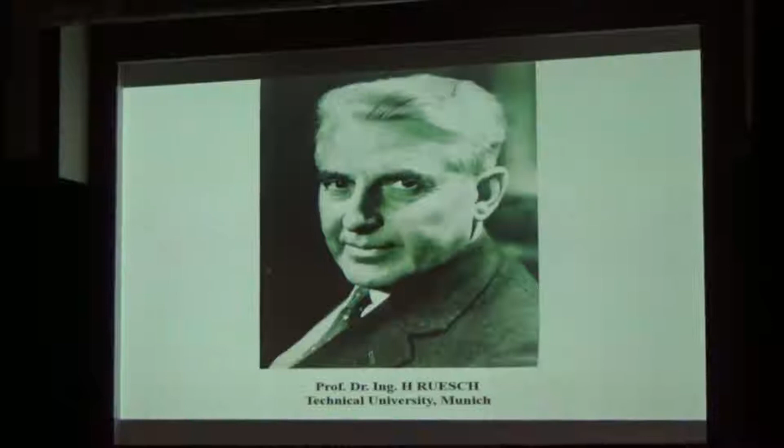I studied at IIT Kharagpur, both BTech and MTech, and my teacher of reinforced concrete structures at the BTech level was Dr. Malik. Unfortunately, he is no more, and I don't have his photo, that's why I'm not showing that. Professor Dr. Varghese, quite a number of you must be knowing him. All the people at IIT Madras know him as the first head of the Department of Civil Engineering, but I knew him much earlier. He was my teacher in MTech at IIT Kharagpur, so he was in a way a mentor for me in my initial postgraduate studies. Then the great master under whom I worked, Professor Ruesch, Professor of Concrete Structures at the Technical University, Munich, who taught all his students, including myself, the purpose and methodology for research in concrete structures.

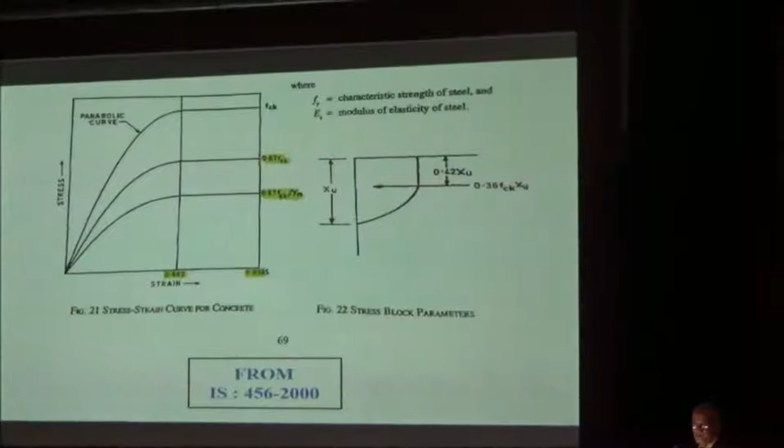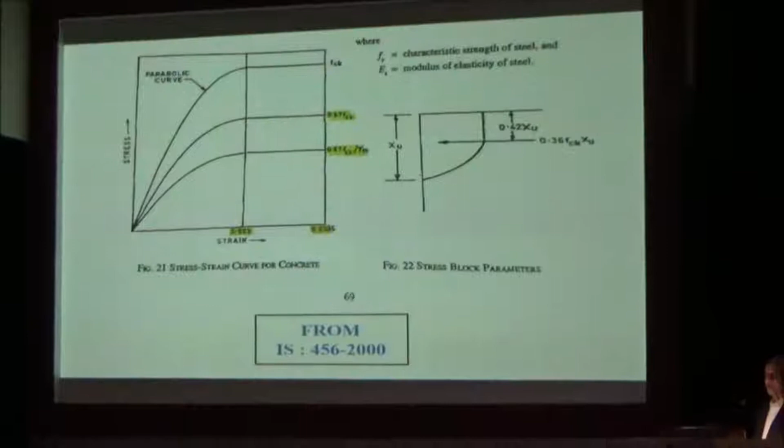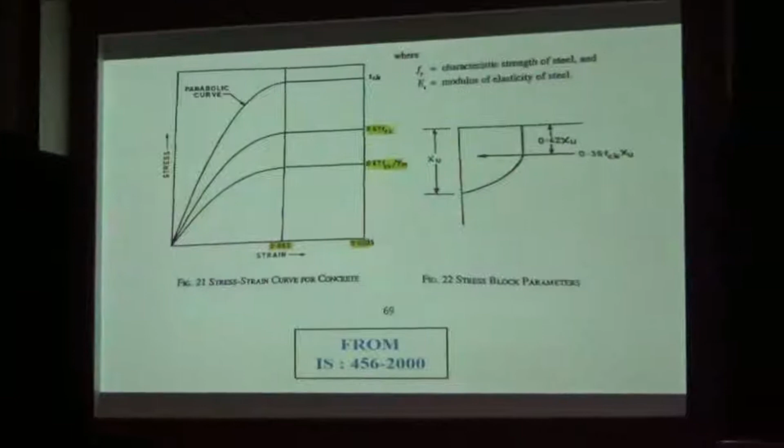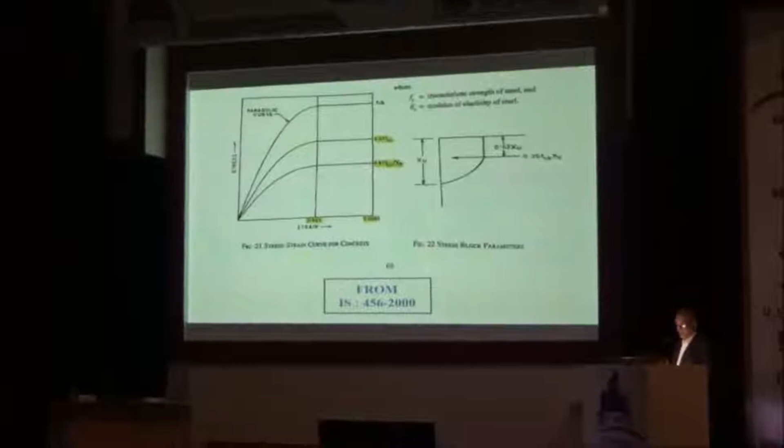Now, after having expressed my respect to the role models I had in my life, I would like to shift to my main lecture. Professor Kordina, the leader of the German delegation which helped us in setting up the structural engineering laboratory, once mentioned that a speech will be considered very great if it satisfies the following criteria: one third should be understood by everybody, one third should be understood only by fifty percent of the audience, and one third nobody should understand. I have formulated my lecture according to that dictate, and I request you kindly to bear with me if you fall in any of these categories.

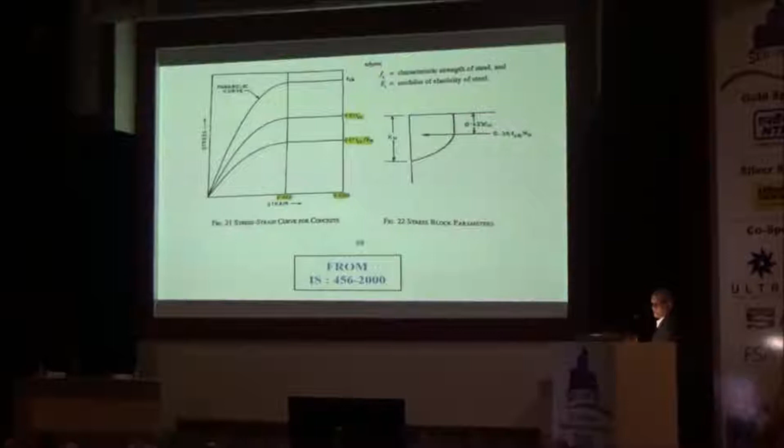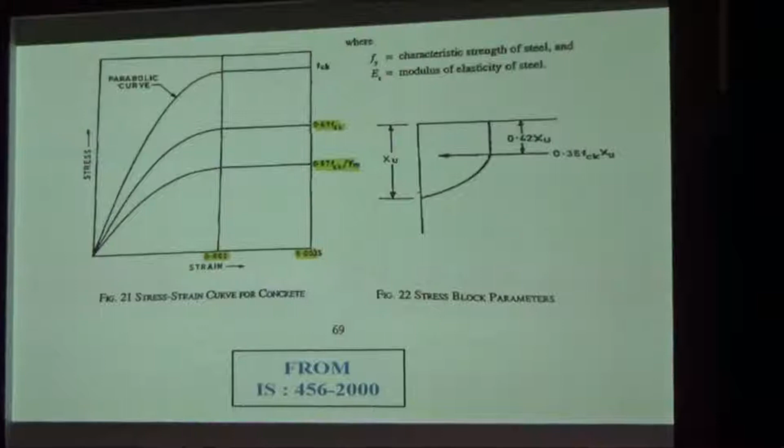The slide I am showing here is from IS 456-2000, the Bible of concrete designers in our country. This is the 2000 version of the Code of Practice, but we had this code even in 1978, so 40 years back almost. It must be familiar to all the civil engineers in India who have graduated after 1980.

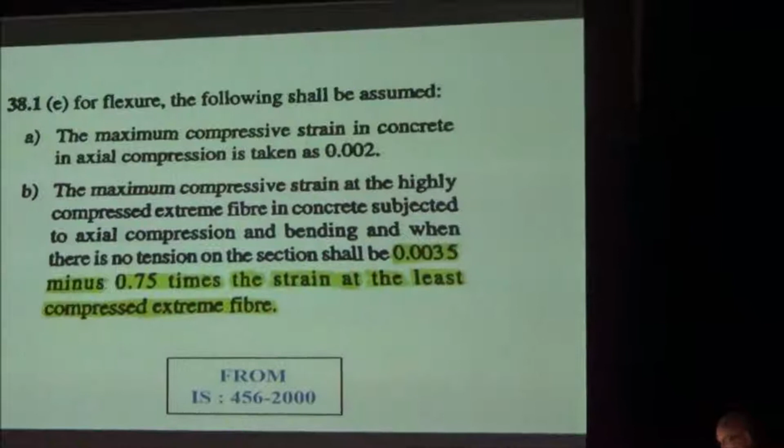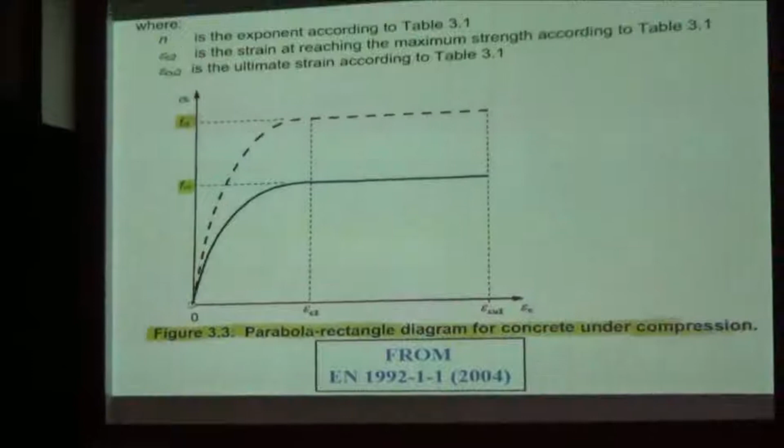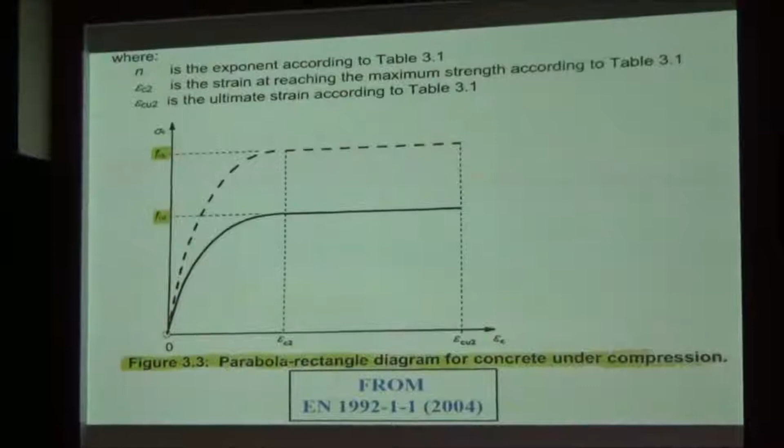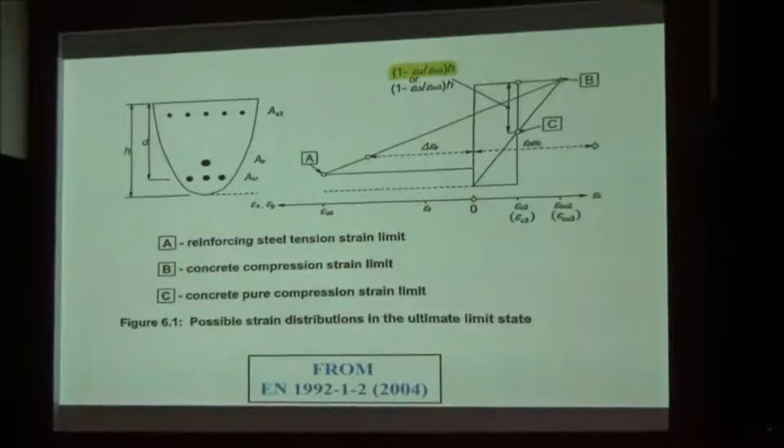And the same code is in the Eurocode EN 1992-2004 version, but it was there 25 years earlier in the model code of CEB-FIP, the French word for Comite Europeen de Beton, the European Concrete Committee. So it has been in existence in the European countries for the last 40 years. In fact, we have borrowed it from the European code into our Indian code. And this is the same curve in Indian Roads Congress Code 112, as recent as 2011, borrowed from the European code.

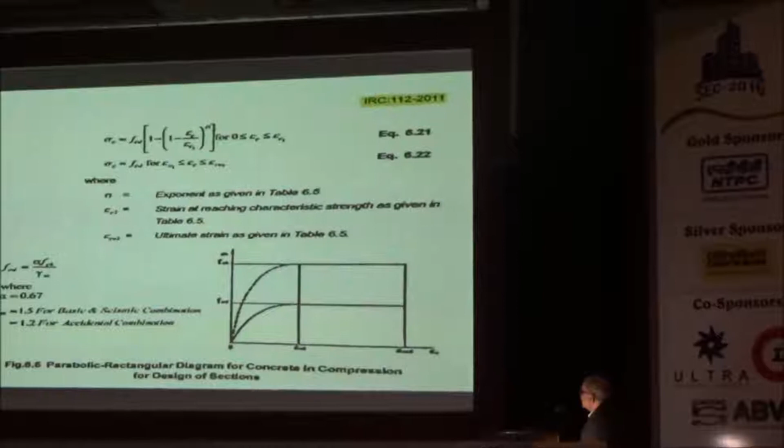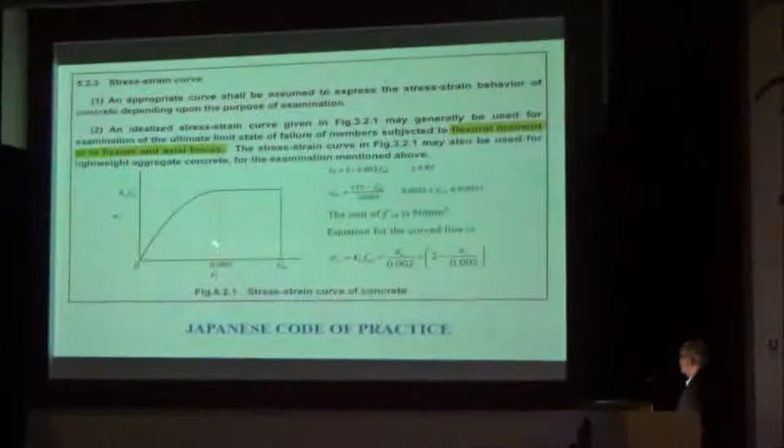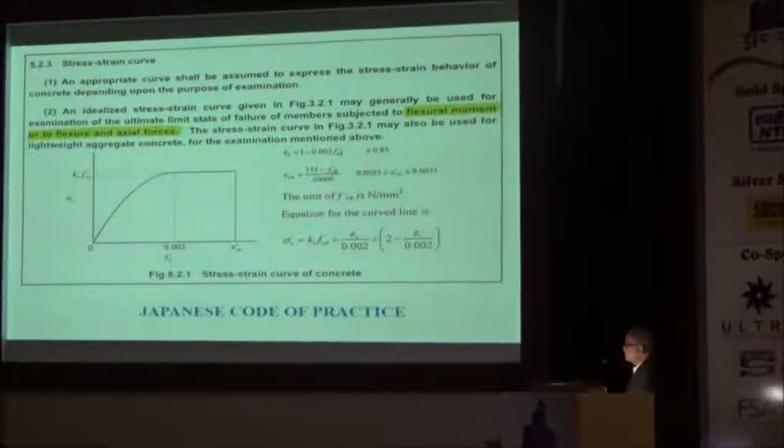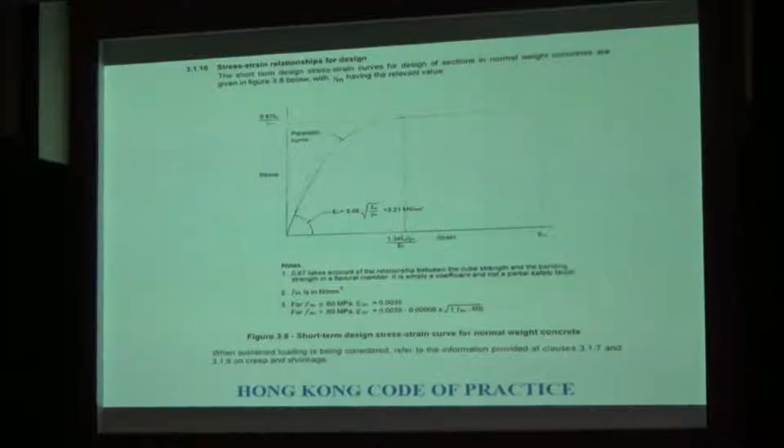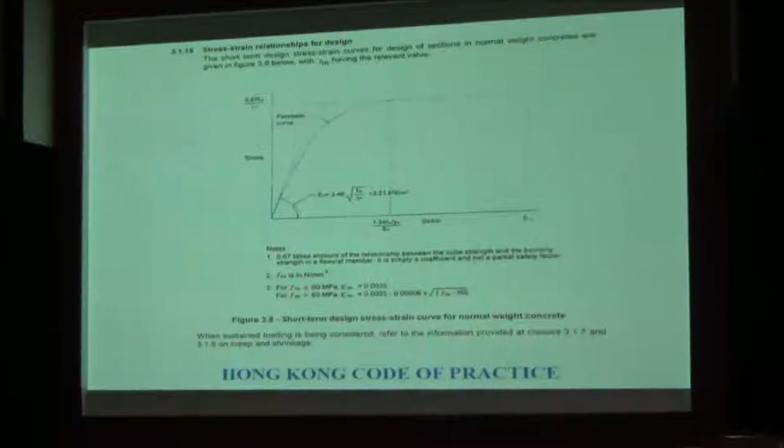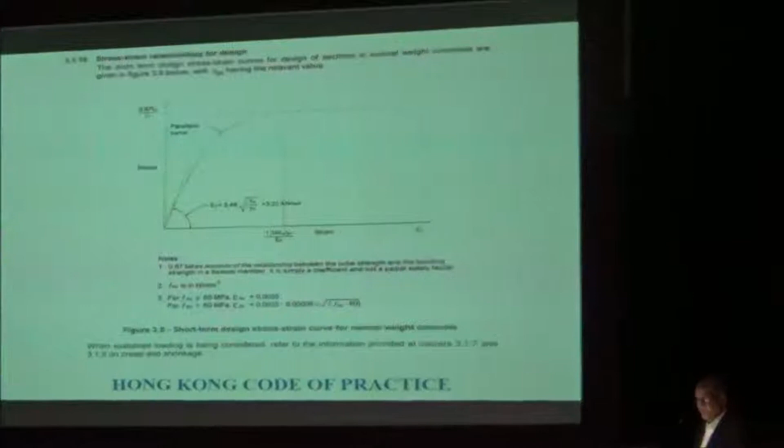Now, our teachers of reinforced concrete design in our engineering colleges all over the country must have been teaching about this concrete stress block, using it for proportioning concrete members, columns, beams, slabs, most of these members subjected to uniaxial bending, simply because it was in the code. Not many people must be knowing from where it has originated, when it has originated. It comes from this publication dated August 1961.

And where I had the good fortune to be one of the authors along with my senior colleague, Professor Grasser. I went to Germany in 1959 as a DAAD scholar.

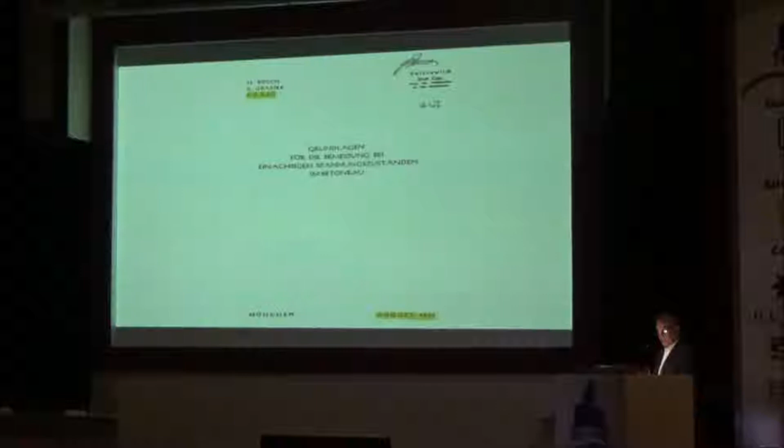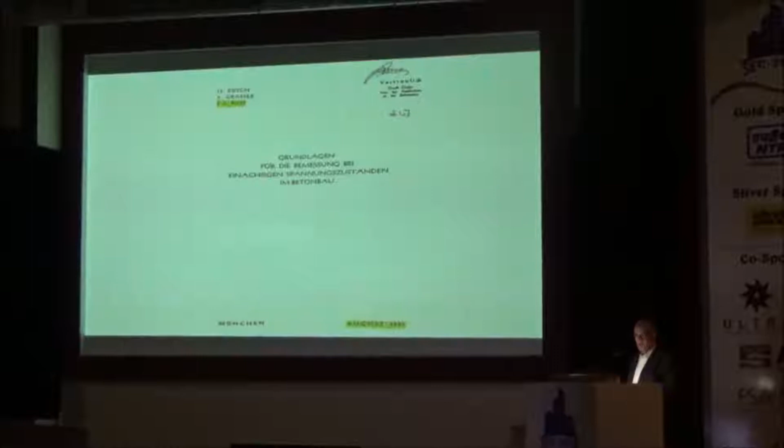I reported to Professor Rüsch and said I would like to work for a doctorate. He said, I don't give doctorates just like that. Simply solving a few equations doesn't make you a doctor. I want the person who gets a doctorate from me to have certain maturity. I would like him to have all-round development instead of merely concentrating on a small area. So first work on a research project which is ongoing, show your mettle, then I will decide whether I should take you as a doctoral candidate or not.

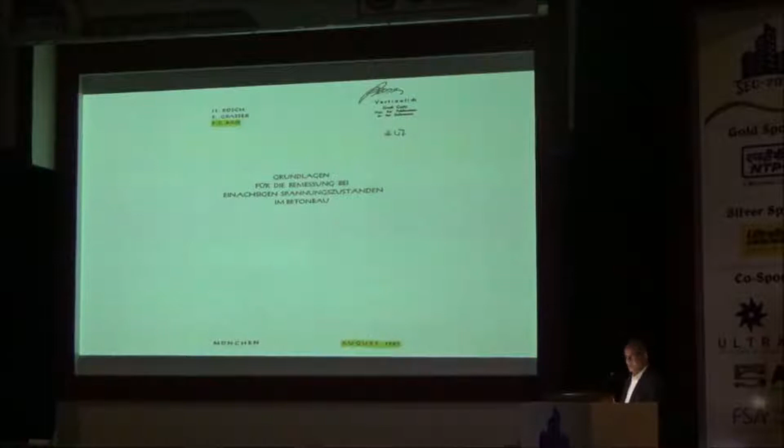And I joined the team already working on a particular research topic, and that was on the effect of sustained load on the strength of concrete. It was a research project lasting about 3-4 years.

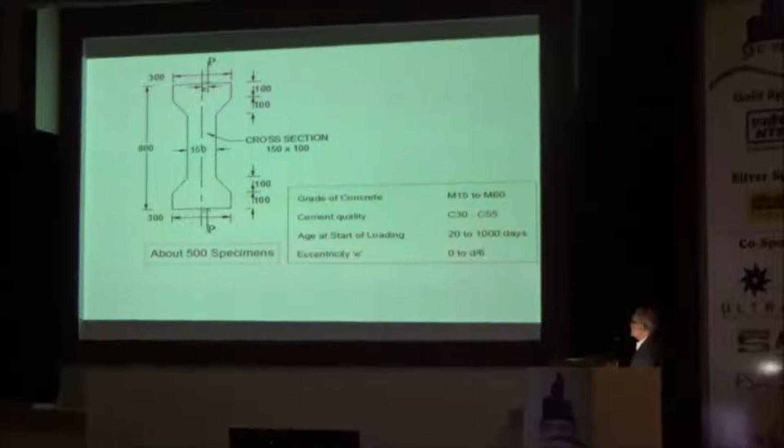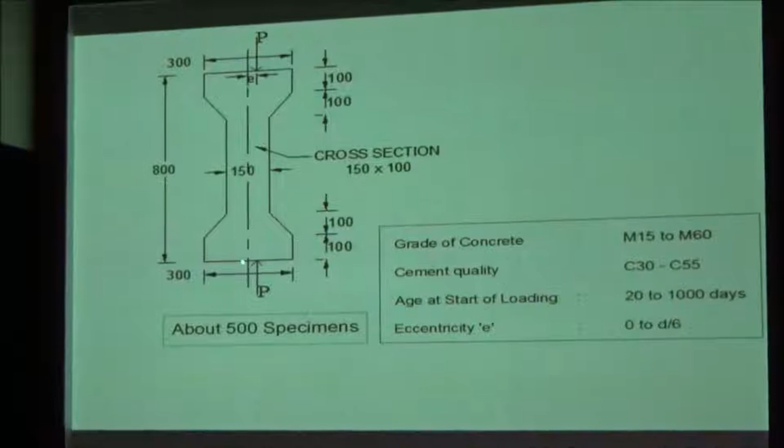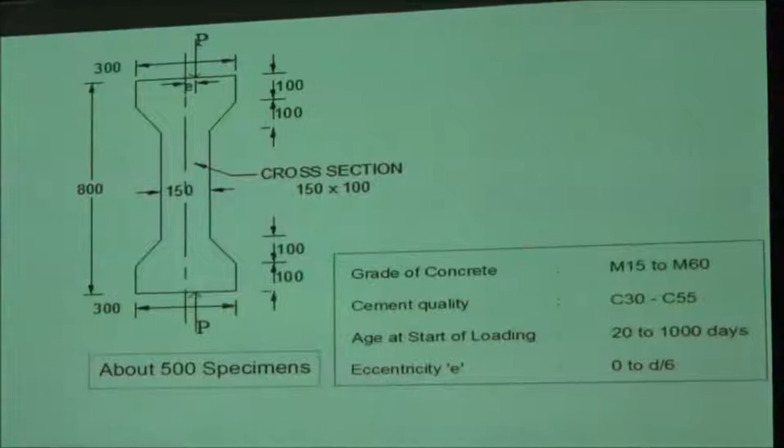Specimens of this nature were tested. We have a load here, with some eccentricity, and that eccentricity varies from 0 to 1/6 of the depth of the cross section. About 500 specimens were tested, subjected to different types of loading, different grades of concrete, different qualities of cement, different ages at the start of loading. And then what happens if I keep the load constant on the specimen for a few hours, a day, 2 days, 3 days, like that.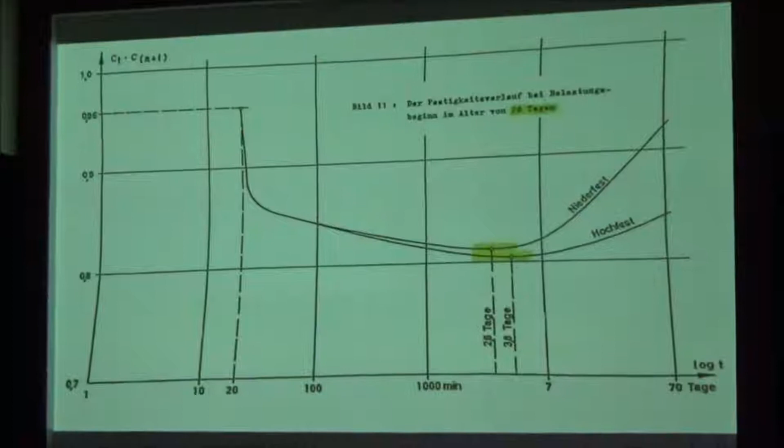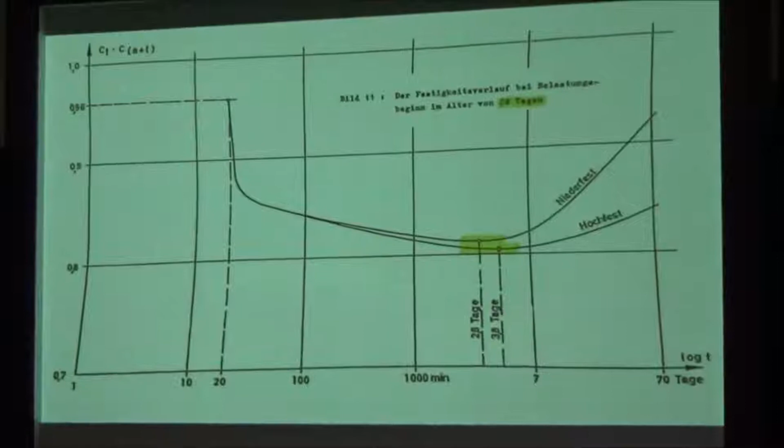Then we got this curve. I am explaining now how we got that parabola rectangle. It didn't come out of our head just like that. There was hard work and full justification for proposing that parabola rectangle in that publication which I showed you.

And here you see the finding of that research project. It's all going forward only. I want to go backward. Yes.

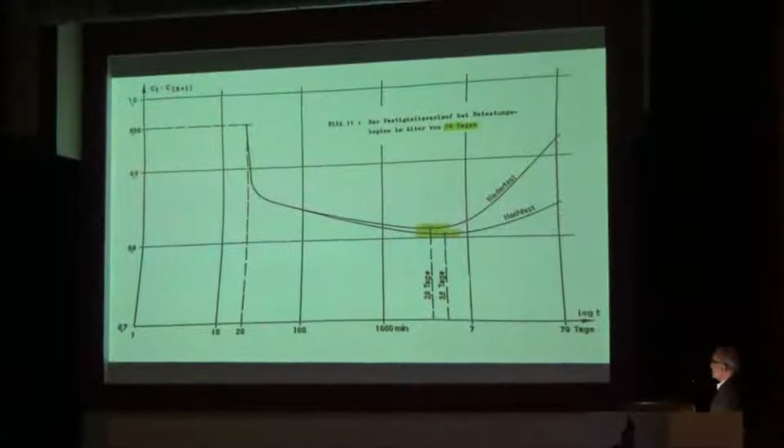This is the short-term strength, for 2 minutes it is 100%. We usually test a cylinder, put it in a machine, crush it in a period of 2 minutes. But then you keep the load constant for about 20 minutes, the strength falls down already by about 4%. Keep it longer, 100 minutes, the strength falls down further. And up to about 4 days, in that region of 3 to 4 days sustained loading, the strength of concrete falls by as much as 20%.

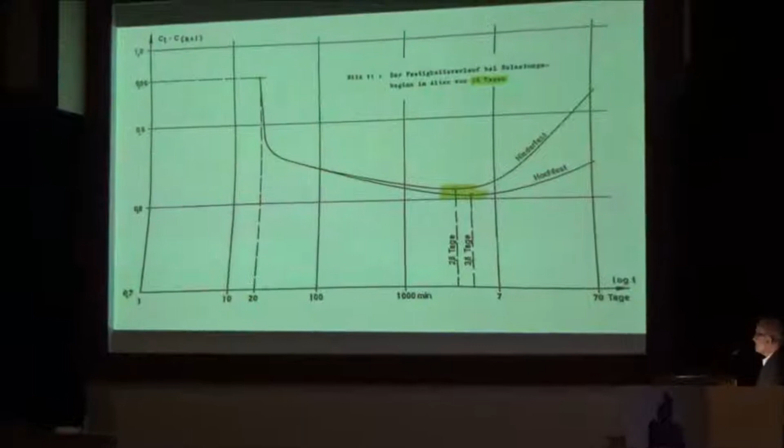Only one strain is the uniform distribution, so the strain over the entire cross section is the same. You have more strain on one side, less strain on the other side. So you should have one particular strain on one side, another particular strain on the other side, epsilon 1 and epsilon 2. And as you keep on changing the eccentricities, you get different combinations of epsilon 1 and epsilon 2, the two strains on the two faces.

And then you try to fit a curve which will satisfy the given eccentricity and that strain configuration. So for a number of eccentricities, specimens were tested and the corresponding stress strain curves were drawn. This is for one particular loading duration, 100 minutes duration.

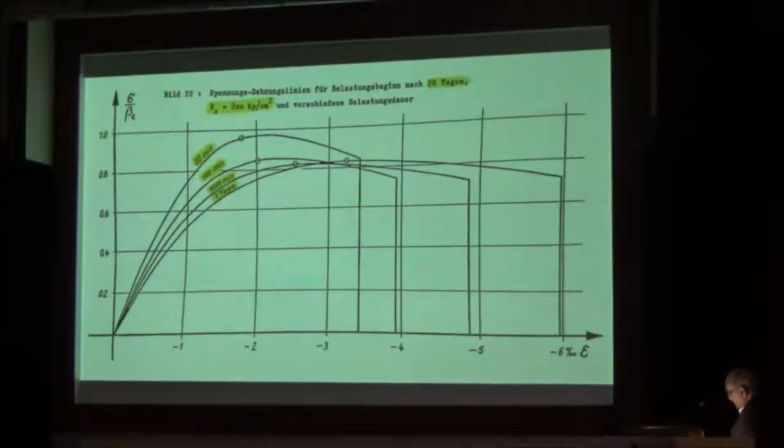I'm giving only one example of the evaluation sheet. Like that, we did it for different durations of loading and obtained the stress strain curves for loading of 20 minutes, 100 minutes, 1000 minutes, 7 days, and so on. Here you have the highest value of the strength, and here you have the lowest value of the strength.

You might have noticed in that earlier curve that after 4 days there is a reversal of the relationship. That was because of the aging of concrete. So we decided that roughly 4 to 7 days is the critical period for getting the minimum strength of concrete. Now when you have so many stress strain curves, which curve should I use? That was a problem. I'm telling you the story of how that stress strain concrete curve was developed.

So which curve shall I use? We decided that we evaluate the strengths of the concrete members using all the curves and compare the load carrying capacity predicted by each of those curves. Now you get different curves naturally when you make use of different stress strain curves.

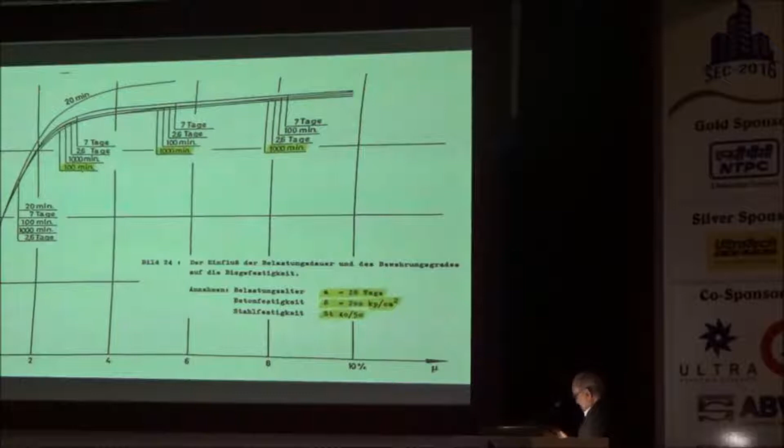So we should have one unified curve. And this is for pure bending. These are the well-known PM interaction curves for small concrete structures. And here again we have the same dilemma, but different curves gave the minimum strength for different percentages of reinforcement.

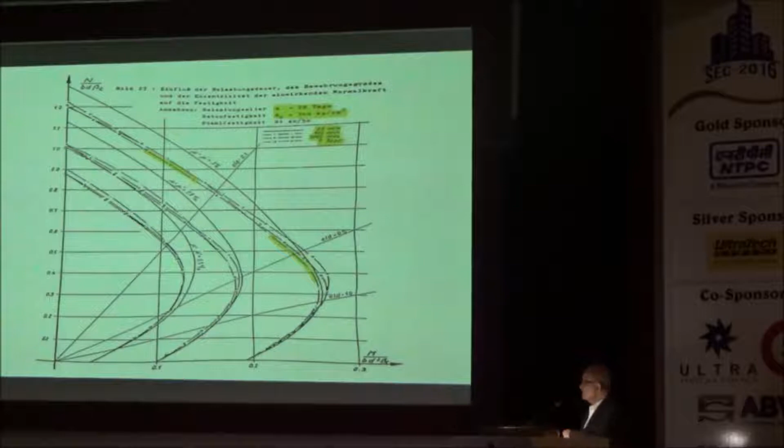So we decided that we go by the absolute minimum of all the curves put together and try to obtain a stress block which would reflect that particular phenomenon. It would give values closest to the minimum observed using all the several curves. And that is this curve.

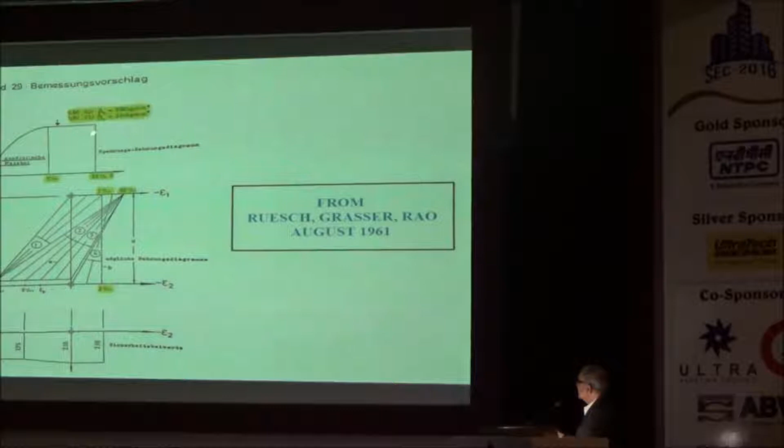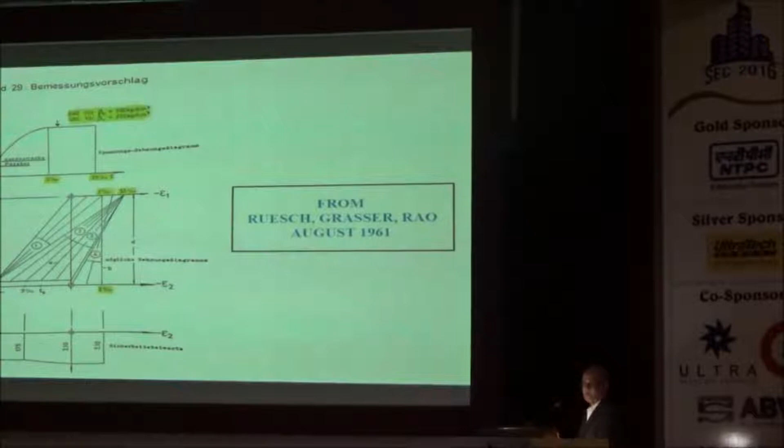And believe me, I tested at least 8 or 10 different stress blocks with different combinations of those strains - 2, 3.5, 0.2 or 0.35%, or expressed maybe as 0.15, 0.25, like that, or a straight line and a rectangle - at least 8 to 10 different combinations, and finally arrived at this rectangle stress block.

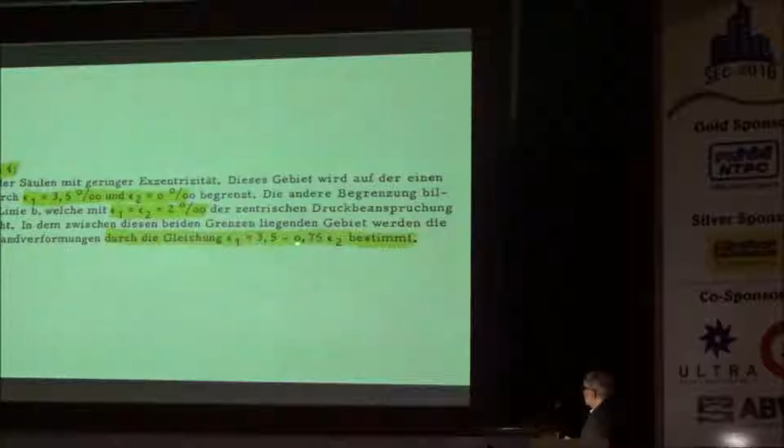Parabola rectangle stress block, and also obtained the relationship between the two strains. This is a well-known equation connecting these two strains, available in the Indian Code IS 456, and available in so many other international codes. So you need information not only about the maximum stress the concrete can take, but also the relations for the strains which the concrete could undergo.

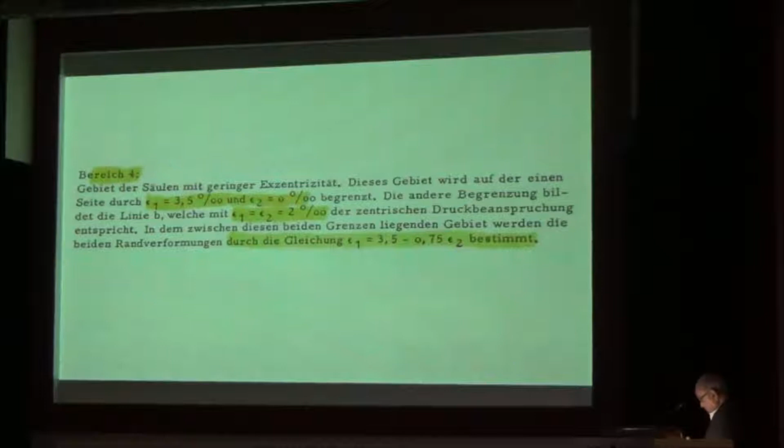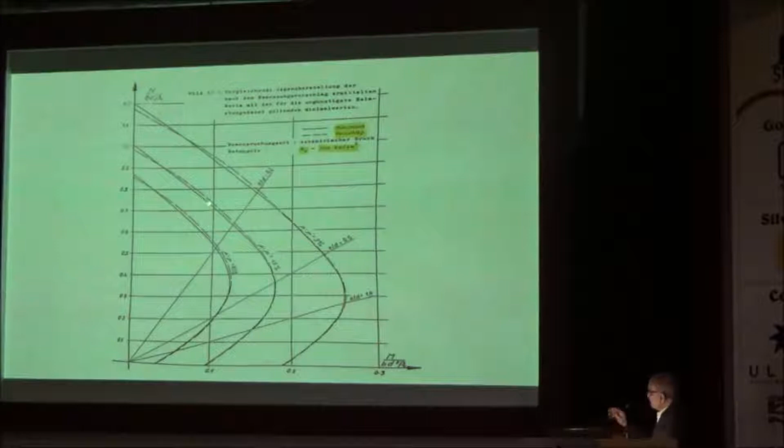Here we have the comparison between the results predicted by the curve proposed by us and the minimum. I showed you the envelope of the minimums predicted by different curves, and they were differing only by about 2 to 3%. Sometimes maybe smaller, sometimes maybe larger. The difference was only 2 to 3%. We were satisfied that with the curve which we proposed, we are recommending a curve which would give the minimum strength under any circumstances.

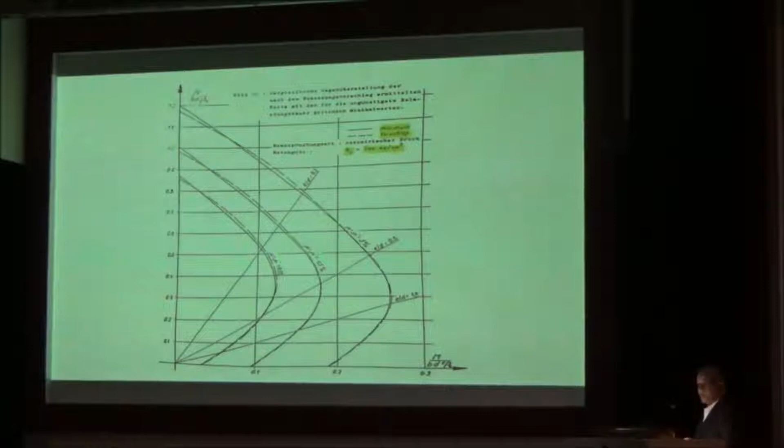And that's what you need for the safety of a structure. So we decided on that particular concrete stress block with those particular strains and those particular stress values, 0.8 times the cube strength. And...

It was published around 1961, which I showed you already. But then, when the European Concrete Committee came to know of this result of ours and the result of our studies published in the bulletin, the European Concrete Committee, consisting of representatives from several countries of Europe including the UK, decided they would like to publish it.

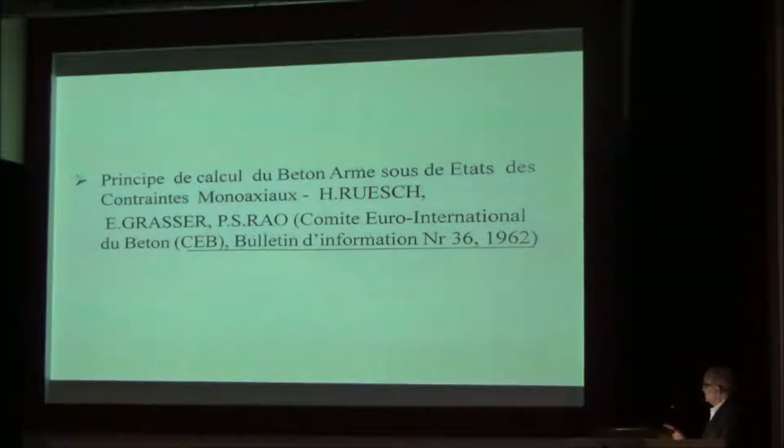French used to be the official language in those days. Now, of course, English has taken over. So they wanted to translate it verbatim into French and publish it as a bulletin of the European Concrete Committee. It got accepted by the European Concrete Committee. It was built into the model concrete code, the Euro code, in the 60s. It was incorporated into DIN 1045, the German standard. And then we imported it via all these different countries in 1978 into our IS 456.

It continues to be valid even today. And even the latest revision of IRC 112, in 2011, carries the same version.

So I wanted to tell you about this contribution of mine for calculating the ultimate load capacity for the limit state of collapse of uniaxially loaded concrete structural members - could be column, could be beam, could be slab. These are the main structural members. Could be footing, foundation footing. So the main structural members used in a building.

This is already - I spent about 2.5 years as a research scholar. Of course, I got, in addition to the general government scholarship, because my professor was satisfied with my work, he took me as a research associate and used to give me a little extra stipend because of that. And then he said, all right, I am satisfied with your work, you go ahead with your doctoral work.

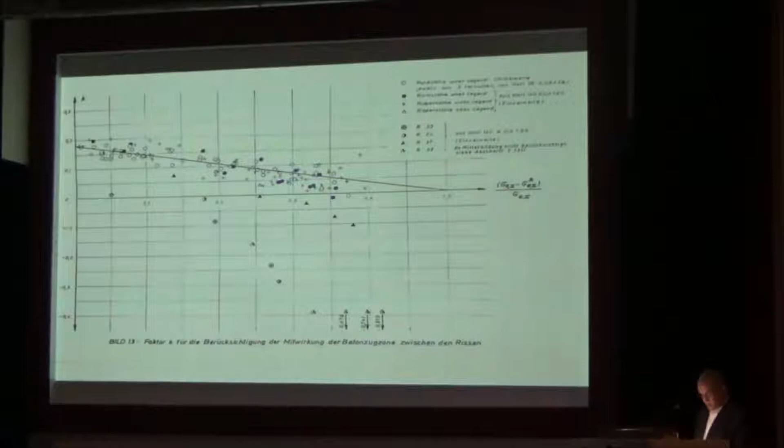But to find out the width of the crack that is likely to be developed, we should know how much strain is developed at the level of steel. And that strain of steel keeps on varying - at a crack it's large, at the next crack it's again large, but in between the cracks it is less because concrete also carries some strain. So we should arrive at the mean value of the steel strain. Unfortunately, no formulae were available.

Methods were available for obtaining the behavior of the concrete member in the uncracked state and in the cracked state, but what happens in reality is something in between - the average of the uncracked section behavior and the cracked section behavior. No methods were available at that time.

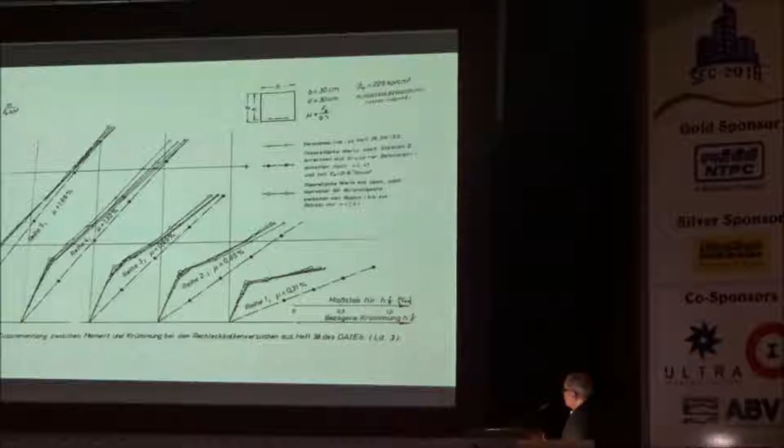So I was given the responsibility of developing a method for getting that true value, and went on evaluating a large number of results already available in the laboratory, and proposed a method for calculating these mean strains. This is the theoretical values, this is the measured values, and you see how well they are coinciding. This again was incorporated into the report for the use of their formula.

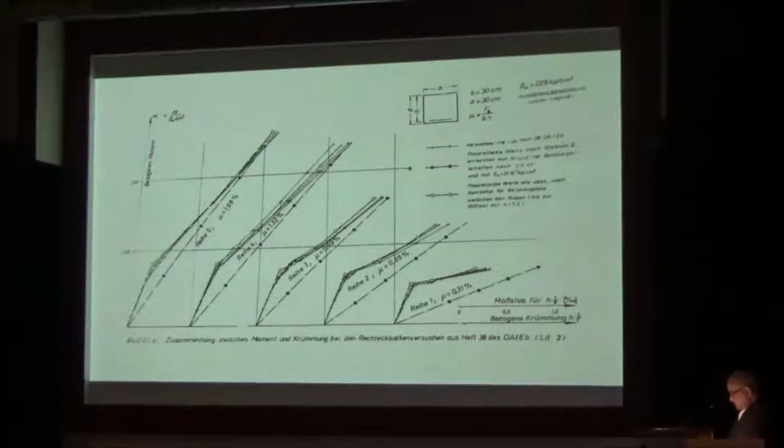For calculating the crack widths and deflections, this was published as a publication of the German Concrete Institute, taken again into DIN 1045, into the Euro code, into the Euro norm, which became official for most of the European countries later.

Skipping this detail - having contributed to determining the strength of concrete and the deformations of concrete suitable for a design office, I wanted to gain experience also by interacting with industry. Prof. Rao was a very well-known figure, so we used to get a lot of structures for proof checking, and I was involved in some of these assignments.

This is a Lufthansa hangar at Munich Airport, having a column-free area of 100 meters by 60 meters. In fact, prior to that, we had proof-checked a much larger area, 150 meters long, 60 meters wide, column-free, for accommodating 2 Boeing jets.

That was for the repairs and maintenance hangars, built for a different company altogether. Lufthansa liked it so much that they wanted it to be built at Munich. I gained rich experience of industry interaction and solving practical problems by involving myself in such activities.

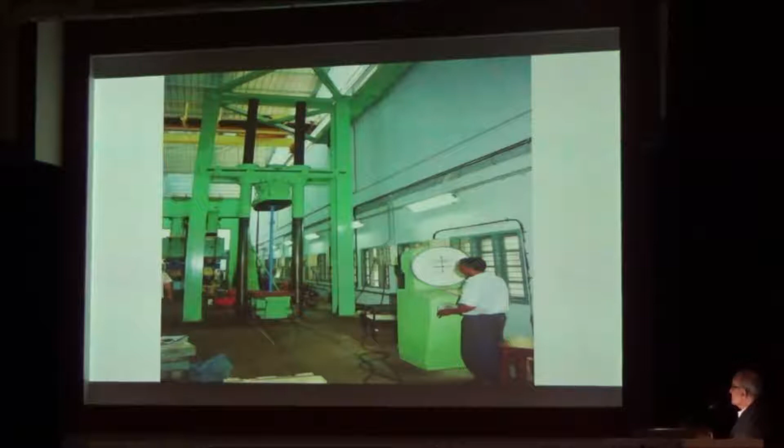This is one view of the laboratory, and this is another view. I don't want to go into further details. It was commissioned in 1971, and it was perhaps at that time one of the best laboratories in the country of its nature, and even today I can say with pride that it's one of the best laboratories in the academic institutions of our country.

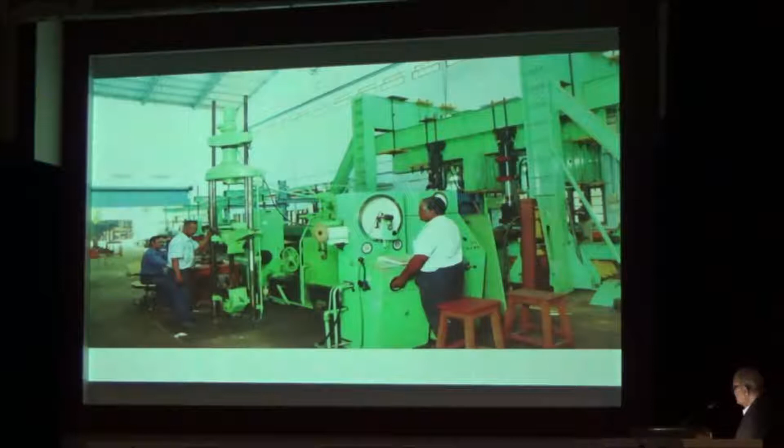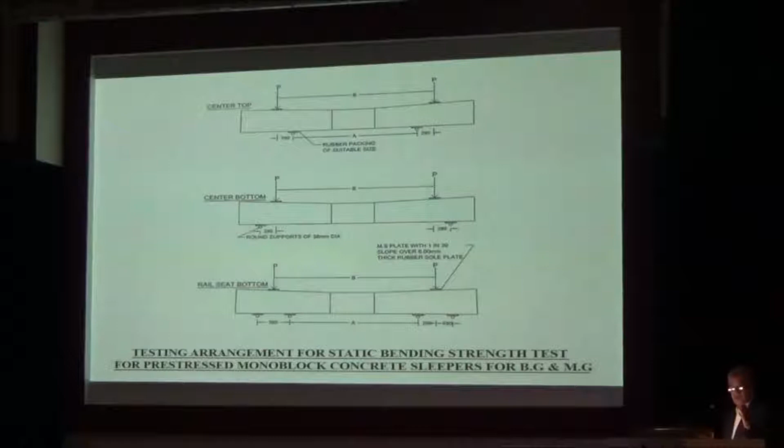At that time, the laboratory was inaugurated in '71, '72. Ours was the only laboratory in the country having facility for dynamic load testing, and that was the time when prestressed concrete sleepers were being developed. When the train moves on the sleepers, it is subjected to dynamic loading. RDSO also did not have facilities, so they approached us and we gladly accepted that, subjecting the sleepers to all sorts of tests.

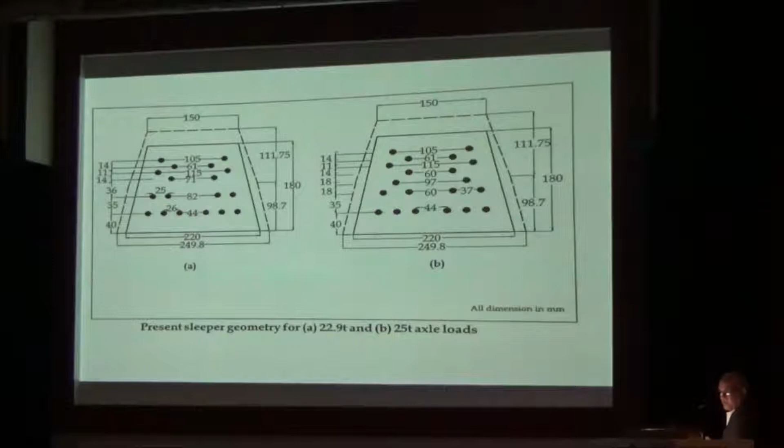These are from the specifications of Indian Railways, and these are prestressed concrete railway sleepers. We interacted with RDSO in improving and perfecting the design, and as many as about 15 sleeper factories in India today, or even perhaps more, are manufacturing these sleepers in millions all over the country.

In fact, one of the experts is here, Mr. Sreenivasa Rao, and his company has itself offered consultancy to a large number of organizations on how to produce these sleepers. We looked into not only the technical aspects but also the economic aspects - how to finance it, the return in the first year, the return in the second year, all financial flow statements. We got involved in preparing detailed project reports to be submitted to banks for financing and so on.

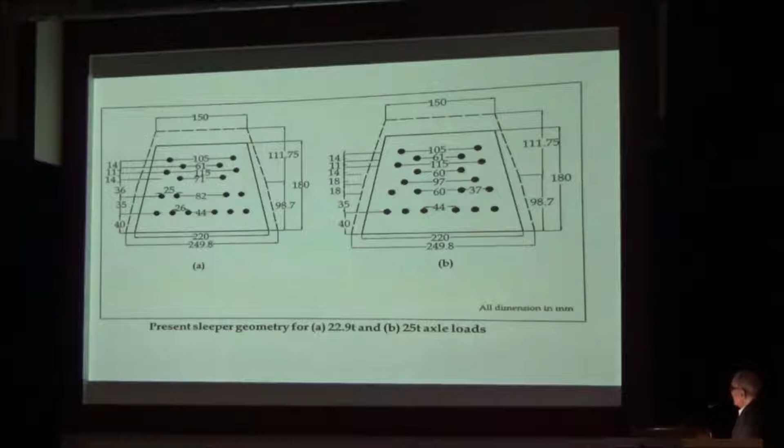So that was the era of sleeper consultancy, I would say, 1970 to 1980, with a number of assignments from RDSO, the Research Designs and Standards Organisation. I should acknowledge here that I had the benefit of excellent cooperation from my colleagues, Professor Ganeshan, Professor Rajgopal, who is fortunately with us, Professor Aravindan, and a number of others who helped me in conducting these investigations.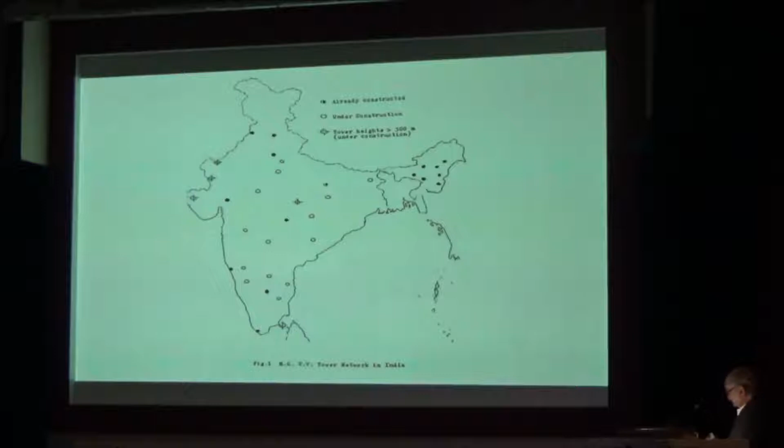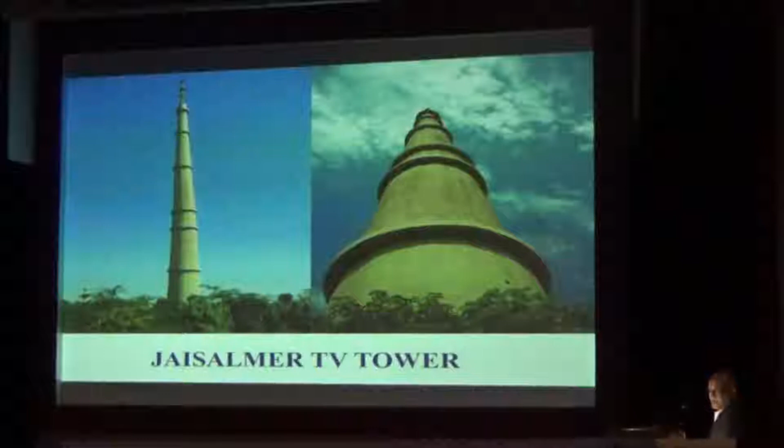This is one of them, Rameshwaram TV tower, about 320 meters tall. Jaisalmer TV tower, also of that order, 320, 330 meters, including the steel mast which you have on the top. The concrete portion is about 300 meters, and then the antenna has to be fixed onto the steel lattice right on the top, whether it's a concrete tower or a steel tower.

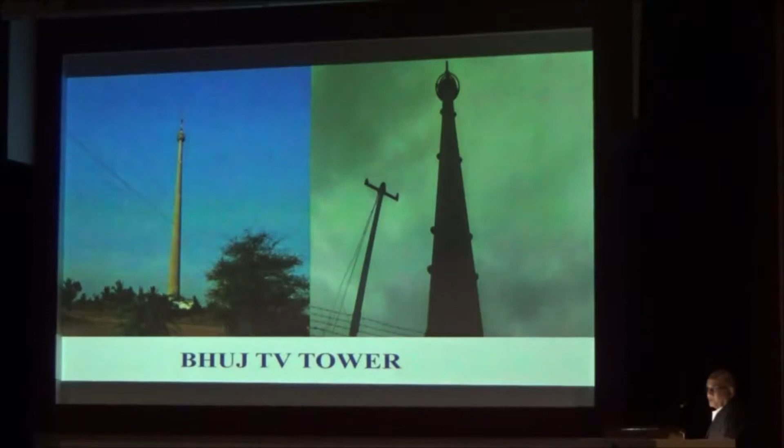And then this Bhuj tower, again a landmark, of the order of 350 meters — not that exact order, I am not remembering the exact heights. This Bhuj tower has a history. It was completed around 1990.

It withstood the very severe earthquake that rocked that area, Richter scale 8, a close earthquake. This is a news item from February 2001, where it was mentioned the tower withstood it without any blemish.

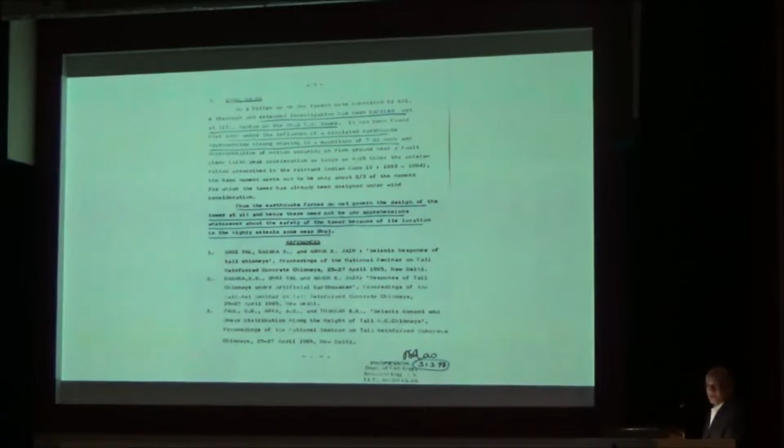I was lucky that my forecast came true. In 1990 itself I certified it. Somebody made a query: is the tower safe against an earthquake? And I gave the certificate that there is no harm, even if a very severe earthquake is reached. I'm fortunate that my prediction held — nothing happened to it.

But then there is a technical reason why that particular tower did not have any damage. The taller the tower, the more flexible it becomes, and the time period of oscillation increases. The smaller the tower, the stiffer it becomes. Now the dominant frequencies of an earthquake do not match with the frequencies of the towers if they are very tall.

In fact, I heard C.V.R. Murty mentioning yesterday that the maximum damage is observed only in buildings of the order of 3 stories and 5 stories. They are the predominant habitat structures in our country.

But if you build a very tall building or a very tall tower, it's very flexible. The frequency of oscillation of the tall tower does not match with the dominant frequencies of the earthquake. So wind, on the other hand, gains the upper hand, and they are much more vulnerable against wind. We design for the one area where we get the maximum earthquake forces and the maximum wind forces simultaneously — nowhere else does it happen, maybe in the northeast region also, where you have very strong winds and very strong earthquakes. For example, along the east coast, you have only winds and no earthquake. So wherever wind is also very high, it governs the design of tall towers, not the 3-story or 5-story buildings.

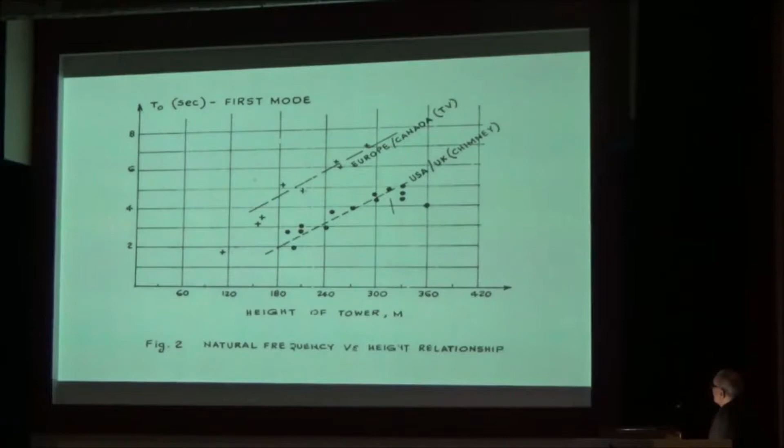In the process of designing tall towers, I developed a passion for studies on cooling towers. Dr. Raman was mentioning about this during his first welcome speech.

These cooling towers are slightly different, the heights are not very high, around 120 meters. The distinguishing feature is that the base diameter is comparable to the height. Huge, massive structures, 120 meters high, about 80 meters in base diameter, with wall thickness around 150 millimeters in the upper reaches. People have described that the ratio of the shell thickness to the base diameter is much smaller than the ratio you find in an egg shell.

An ordinary egg has a shell of oval shape, with a thickness and a diameter. If you compare the ratio of that thickness to diameter with the ratio of this shell's wall thickness to its diameter, this is smaller. So it's a very, very thin member, which is why there is a danger of possibility of buckling.

We had concentrated investigations on buckling of concrete shells, these cooling tower shells. We proposed some increase in the wind pressure in the top regions of the shell, but somehow that didn't get accepted so far. I hope it will one day get accepted in the board.

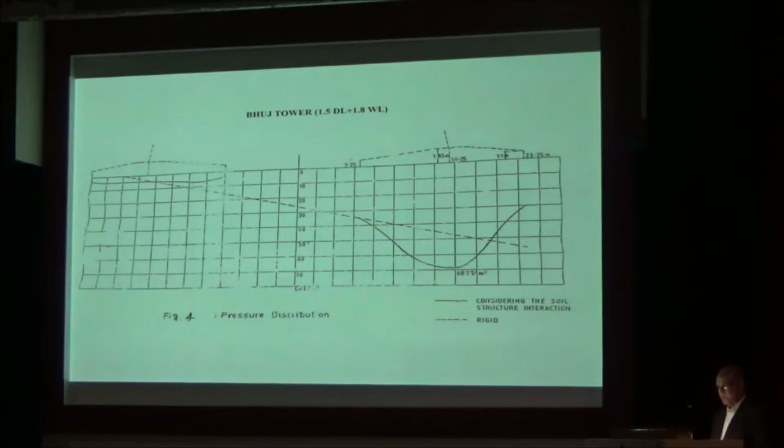It came into existence only in 1987. In fact, most of our towers were completed by that time. We didn't have any code for designing, so we had to compare several national codes. One code says something, another code says something else. Somebody talks of mean hourly speed, somebody talks of 3-second gust, somebody talks of fastest mile of wind - the Americans do that, I never understood what it meant. So all different definitions of wind velocities, all different load factors.

We found that at that time the Canadian code was the best available, and we reproduced that. I told the Doordarshan people, please reproduce that Canadian code and make it a condition of your contract. Otherwise, designer A comes with British code, designer B comes with American code, designer C comes with some other code, and then you just can't compare. So I told them, please specify the code - the Canadian code at that time dealt with this gust factor method most elaborately.

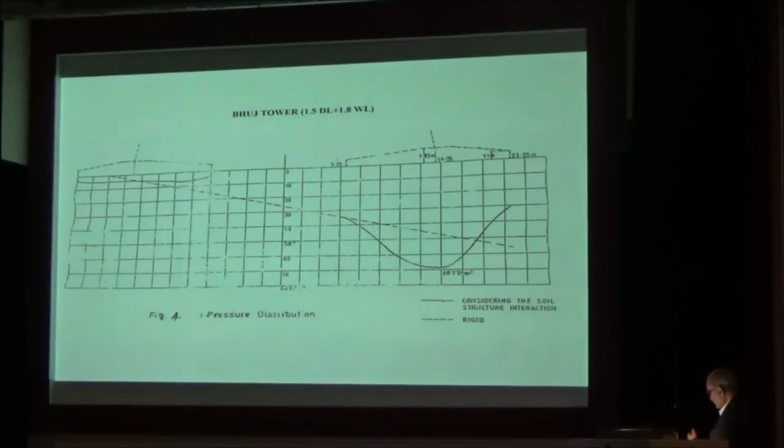You see the difference in the magnitude of the stress resultants - this one assuming soil-structure interaction, and the other one assuming it as rigid. So the country gained a lot of economic advantage by this recommendation.

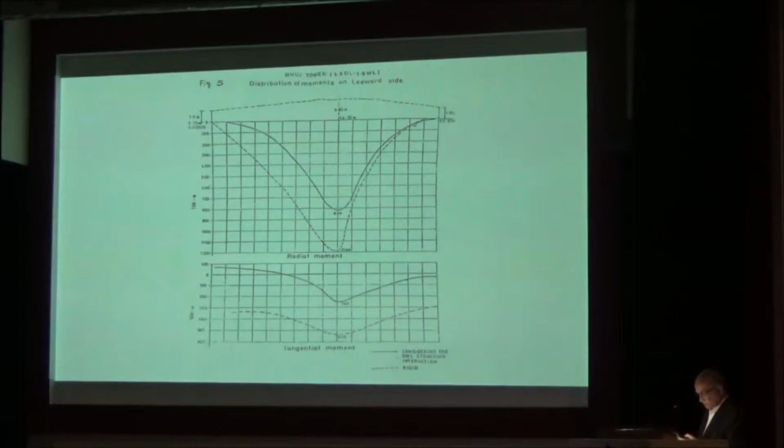We applied the same principle of soil-structure interaction for designing harbor structures. The pile resting in soil - the soil resists the lateral pressure. When you have mooring forces pulling the berth, the ships get berthed there, but the pile presses against the soil and there is a reaction offered by the soil. If you use soil-structure interaction principles, again you get very economical designs. So some of our research work was concentrated on that, and it was of great use to many port authorities in India.

This is the work I was doing when I was at IIT Madras. I shifted to Visakhapatnam, became the principal of the Gayatri Engineering College in 1997. I was the principal for 10 years, and even today I continue my association with the college as an advisor.

But I have always liked to interact with the industry. I gained by that, the industry also gained by that. When I became a better teacher, learned from the industry what is needed by them and their practices, I could incorporate that in my lectures to students. That's how we were integrated into industry-institute interaction at IIT Madras. I wanted to convey the same habit, same line of thinking to my colleagues at Visakhapatnam.

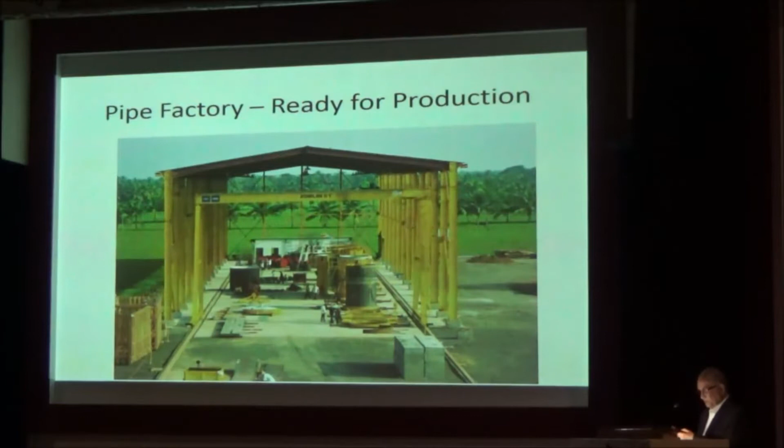With so many constraints, they wanted my team at Visakhapatnam to develop that high strength. I'm glad to inform you that they succeeded and helped that German company. It was used in building a tunnel-like structure. There was a river, the Godavari, going across about 2.5 kilometers. They started boring from here, inserting the pipes from one end and the other, meeting at the center, and coming out at the center shaft. It was a very, very interesting experience.

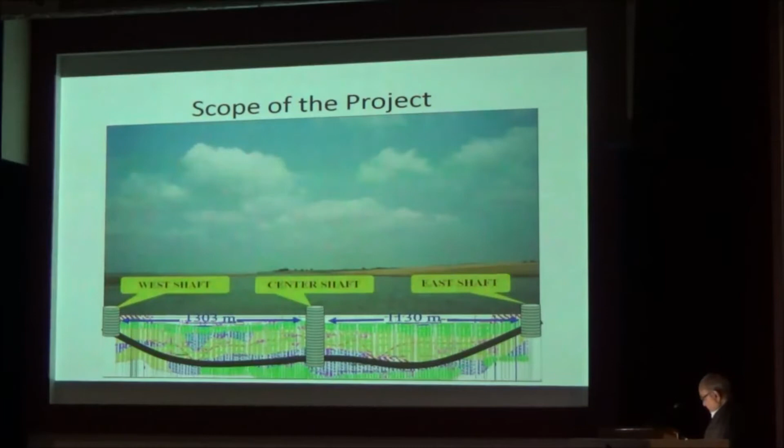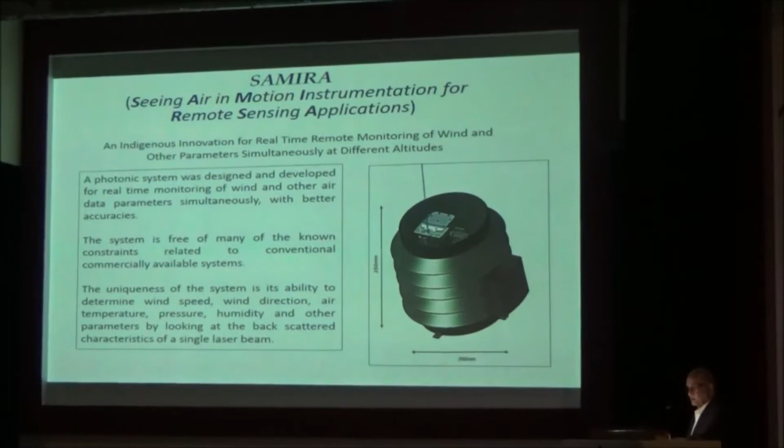Now, we believe in interdisciplinary research. I'm trying to carry out some interdisciplinary research for the consultancy activity at Gayatri Vidya Parishad College of Engineering. I'm glad to show you here one instrument developed by one of our very talented colleagues, Dr. Tatavarti, using laser technology for measuring wind velocity.

It's just one small instrument shooting out a laser from the center along the height, and it can go up to 200 or 300 meters. It takes the reflected version from different heights - 40, 50, 100, 200 meters - and measures the characteristics of the scattered light that comes back from these different heights, which can be programmed. You can predict the wind velocity, wind pressure, wind direction, wind density - all parameters required for the design of structures or wind power equipment.

In fact, I met Gomathinayagam here - he's here. We are interacting with the National Institute of Wind Energy in developing this instrument. I hope you are satisfied with what we have done. He's delivering a lecture tomorrow morning. So these are some of the activities we are continuing even at Gayatri Engineering College.